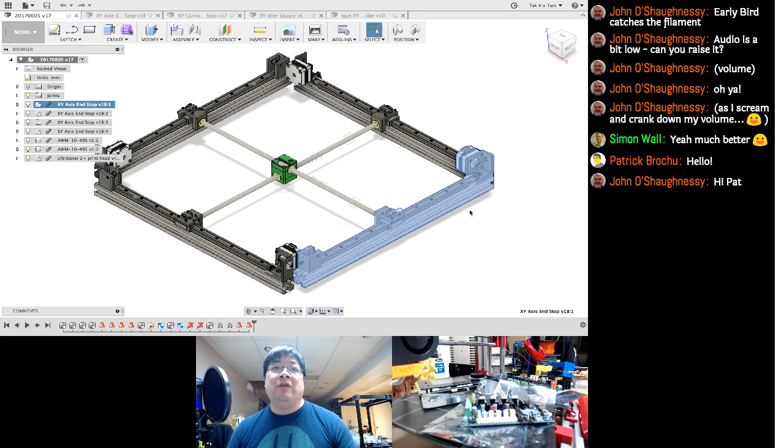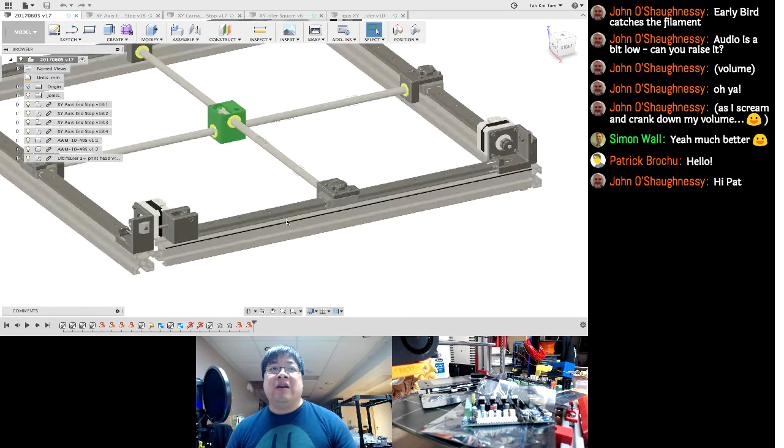Right now the extrusion, the whole one side of the square, is 500 millimeters. So if you factor in the fact that you have two 30-30 at the end, that's 560 edge to edge on all corners. It is big. It is more than half a meter square. But we needed that for a few reasons. The rail, let me see if I can highlight that. Yeah, there we go. That linear rail is 400 millimeter travel.

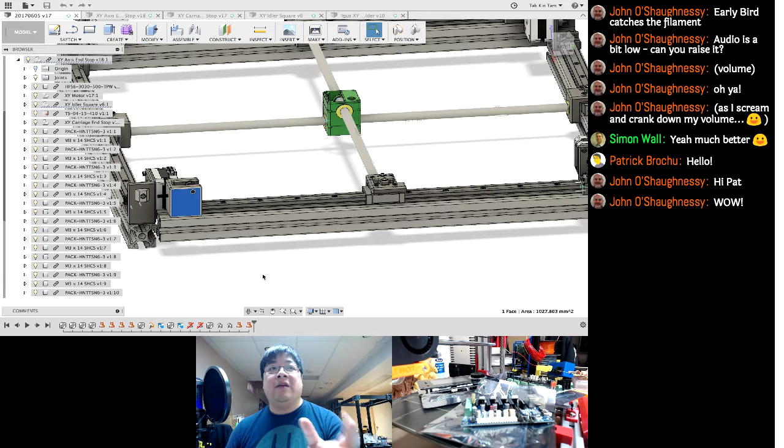So with that said, I needed about 45-50 millimeter for the motor mount. The smallest NEMA 17 is 42 wide, so having a 50 millimeter mount is kind of the minimum you're going to get out of that side. The idler side is 35 to 40, I haven't figured out the design yet, but right now it's 35. That leaves about 15 millimeters of gap here, used for the belt tensioning. We'll get into that in a second.

Because the rod is also placed in the middle of the carriage, effectively it gives us a travel edge to edge of 368 at the minimum, and if we move this idler towards the edge, we'll probably get about 370. But conservatively, advertised travel is 350. So that gives you 350 on the X, and I haven't decided yet, maybe 350 or 400 on the Z, depending on how you guys feel. So that minimum is going to give you a 350 cube.

It doesn't sound like a lot, but the MK2 bed is what, 250 by 210 and 220 high. So effectively, in two directions we are 100 more, 150 more actually in some, and then 100 more in the other direction. That is huge in terms of increased volume of what you could print.

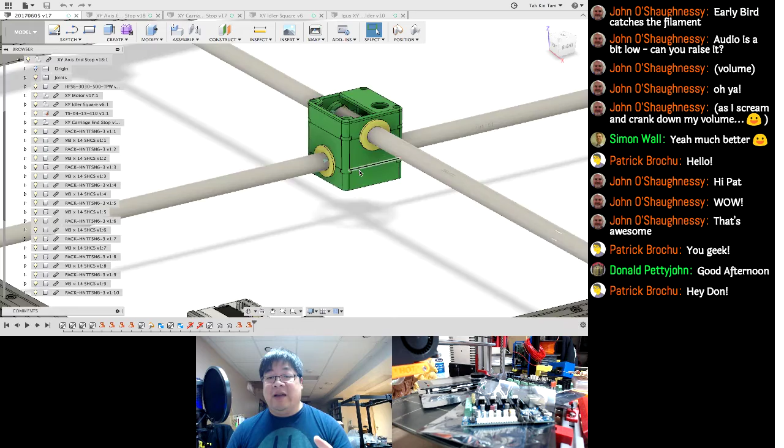So, to give you an idea of the size, keep in mind, this is the STL I pulled off of Ultimaker GitHub, it is the exact spider used on the Ultimaker 2 Plus. So keep that in mind when I show you pictures of the Ultimaker 2 Plus later. This is the size of the spider compared to the print surface. You could tell how big this print surface is.

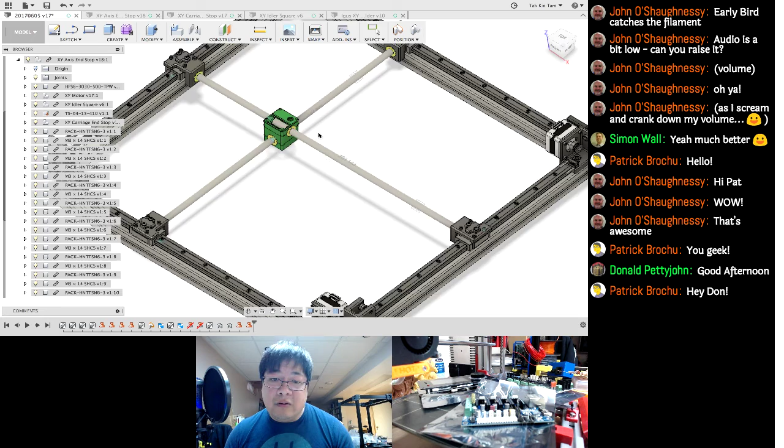Like if we look at this, let me see that. Let me move that. That's one thing I didn't like about Fusion. The numbers are really hard to see.

Okay, so roughly about there. So from here to where the spider is, is roughly the print surface. Let's go a little further this way. That's roughly the print surface of the Ultimaker 2 Plus. So this quadrant is bonus. You normally only get this much, and this is going to be the extra build profile that we're going to have.

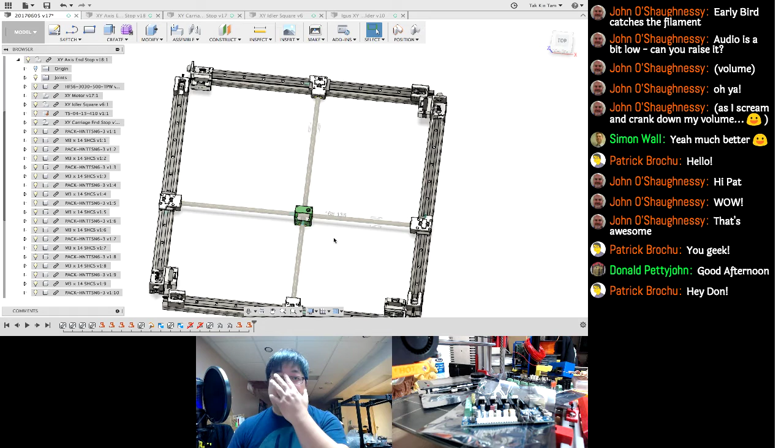It's still going to be smaller than the Gmax 1.5 XT on the actual footprint, because there's two problems. One is we're restricting ourselves to lose about 50 millimeters of travel all around, because we were working on the restriction of having everything inside the enclosure, so that the enclosure walls don't need any interface. You don't need any holes or anything like that. It'd be fully enclosed, so all the hardware is inside.

So out of the 500, we lose about 100 for the sides. So we really only have an internal work volume of 400 to work with. Plus, then we have to worry about things like the motor mount. So that's why it's down to 368 from 500.

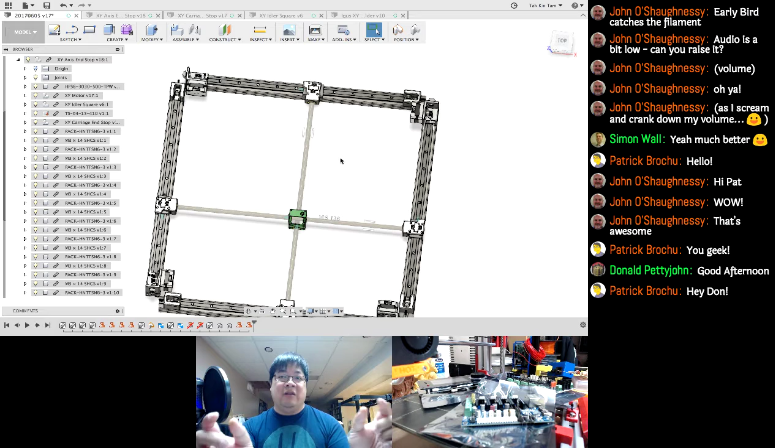But the reason why I might pump that up to 600 extrusion and 500 rail is because you still lose 50 on each side, but percentage-wise you're losing less, because you're scaling it up, and that 50 over 600 millimeters is tiny. So if we went up by 100, that would give us 468 all around, basically the volume would be almost 8 times what the MK2 is going to do if you did it in all directions.

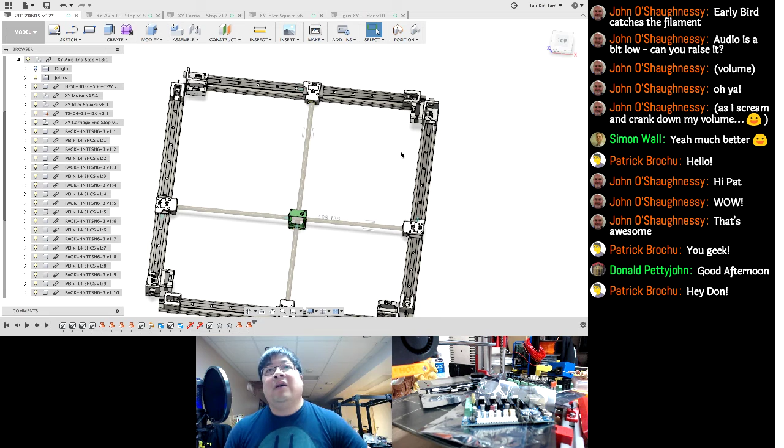So let's just go and get to the top. This still uses the cross beam or cross rod gantry system. This axis moves along these two carriages, and this axis moves along these two rails, and by combining the two, moving the motors at the same time, you effectively have a plotter action where you could put any coordinate in the space here.

So the one advantage of this versus, let's say, D-Bot or any of the other ones where they have a lot of motorized stuff you're moving around, is that the motors are stationary, and you're pulling it along the linear rail.

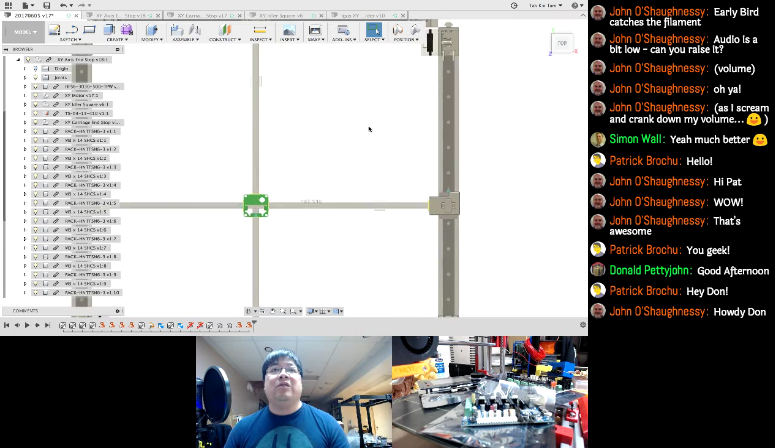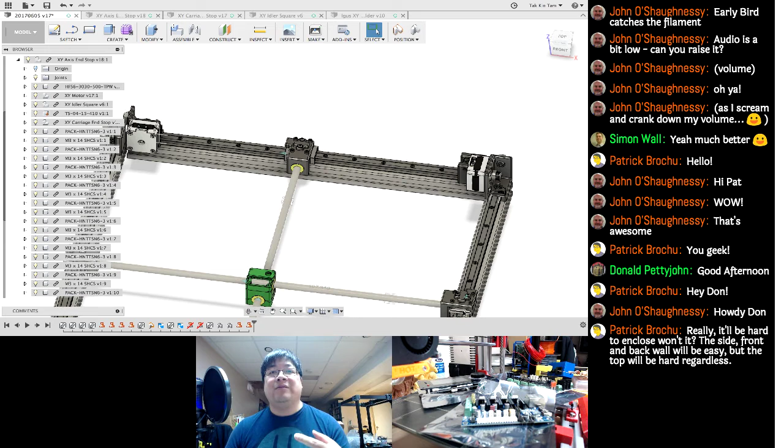The switch to linear rails actually was a conscious decision to eliminate a lot of the rods, because if you look at an Ultimaker, this axis would have been a rod that this carriage rides on, and it also acts as the axle from the motor to turn the pulley to move the corresponding carriage.

So now the other problem is that when you go over such a long span, like we're doing 500 millimeter spans, you have certain sagging. So with linear rails, it's fully supported on the extrusion, so there's no sagging. I mean, it's part of this extrusion. The carriage rides on this rail, so there's no chance of deflection on the linear rail itself.

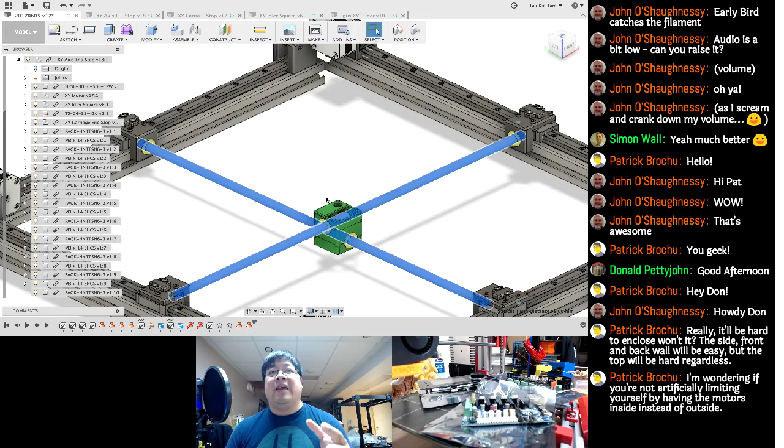The chance of deflection is going to be on the cross rods here, but because there's 4 points of contact and then the fifth here to kind of tie the two together, you're only going to have sagging at the edges. Most of the time this spider is going to spend is the movement inside this center area; the only time you're going to get sagging is when you have an extreme condition where you have the spider in one corner, so these two rods have a chance of deflection here and here.

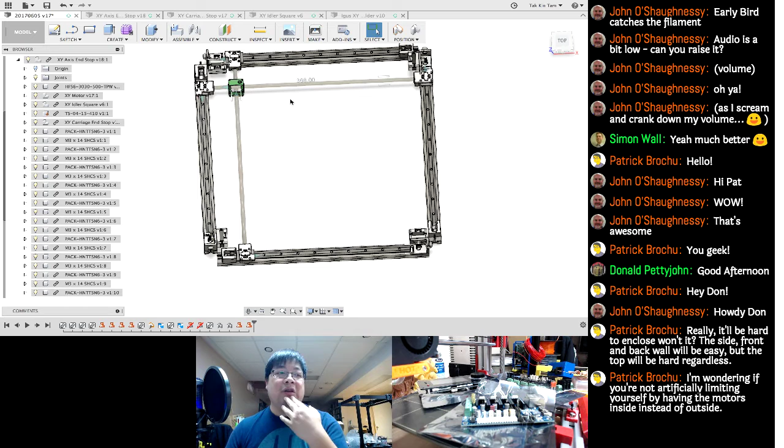But the time that you spend in that corner is very low if you start to just print your stuff kind of in the 80% area, right? So even then, that span is only about 400. So on a 10mm rod, 400-ish is still pretty good for deflection. I got a rod here that I'll show you guys later, but the chance of that deflecting and bending over that is pretty low. So I'm not going to really worry too much about it. And it only starts to sag on its own weight.

So I'm looking into using aluminum rods or carbon fiber rods for this. I know that I was talking about carbon fiber rods before. I need to get them made. I know a guy who can make them exactly 10 mil, so we don't have to sand them or anything like that.

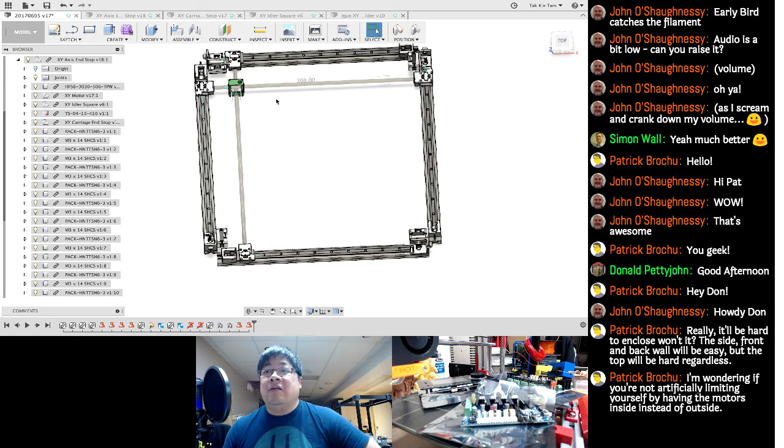Well, so I am sort of artificially limiting myself by the virtue that I'm trying to keep the outside walls clear of any sort of protrusions from the motor and stuff like that. At the same time, it's not a huge hindrance. I guess the alternative is that we could put the motor on the outside. What would you gain back? You won't gain back any clearance. What happens is that you would keep the motors on the outside of the enclosure so that in case there's any sort of heat issues, it'll be on the outside.

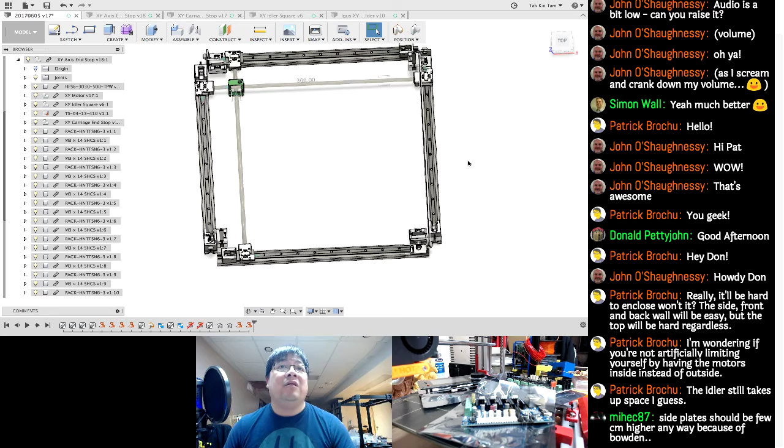If I zoom in here, right now it's not really showing it because I haven't added it yet, but there's usually either 30-30 or 60-60 extrusion here, and this is kind of the demarc line where the outside extrusion would be where you slide the wall for the enclosure. You could flip this, like mirror this whole motor mount over so that the motor's on this side of the demarc point. That'll keep it on the outside, and still the pulley would be in the same spot, so you don't have to worry too much about that. You just basically play around with that motor mount, but the rails and everything stays the same.

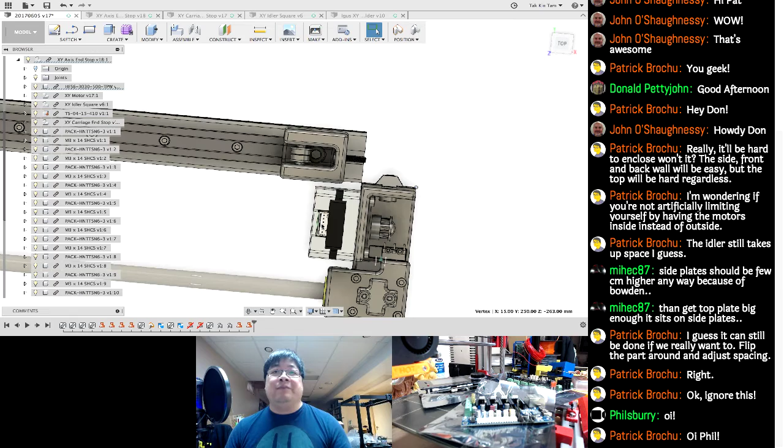Because we're not even in alpha yet. We're entering alpha, so we might as well just kind of play around with it. For me, I don't really see an issue because I have all this space to play with anyway. Because this idler on the other axis is constraining how far the other rod could go here, right? So I have this much space to play with. And sticking a motor here makes sense because then it's more compact. So we could play with that. That's something that we could deal with later.

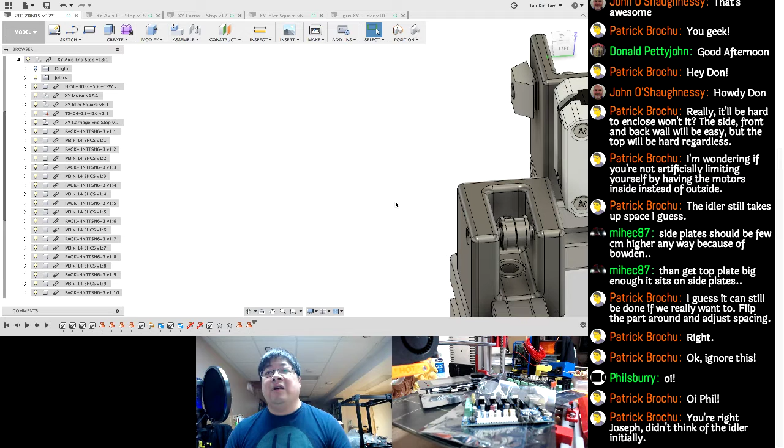So since we're in this corner, I will show you the tensioning system. So these two are the two idler flange bearings. The flange bearings are used to return the belt to the other side. And how we would tension that belt is, get a good angle here. There's an M4 bolt here that comes through this block and into the nut that's in the vertical member here.

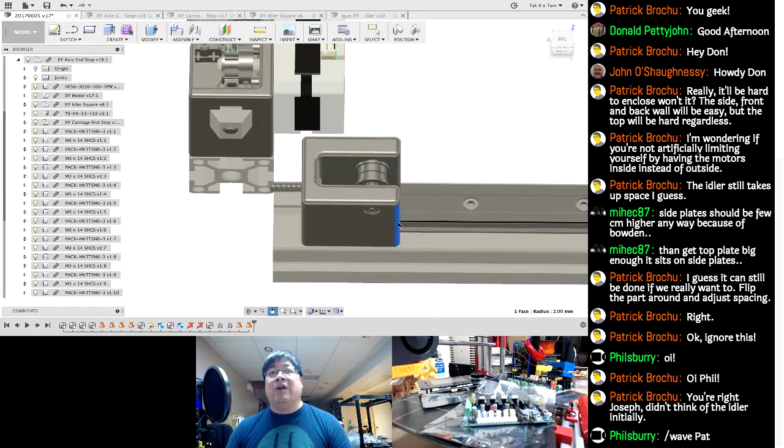By tightening this bolt, you're pulling this whole thing closer and away from the belt, so that you tension the belt by moving this block along the extrusion. So ideally you kind of have a built-in tensioner, and you don't have to worry about tensioning the belt at the end of the belt mount area.

This is going to tension right here in the end, and I think I showed this in one of the previews. This bolt is actually accessible underneath this idler, underneath the belt. And also the mounting for this is also accessible from the belt side. So you would have to use a ball end here, and you use a straight one here.

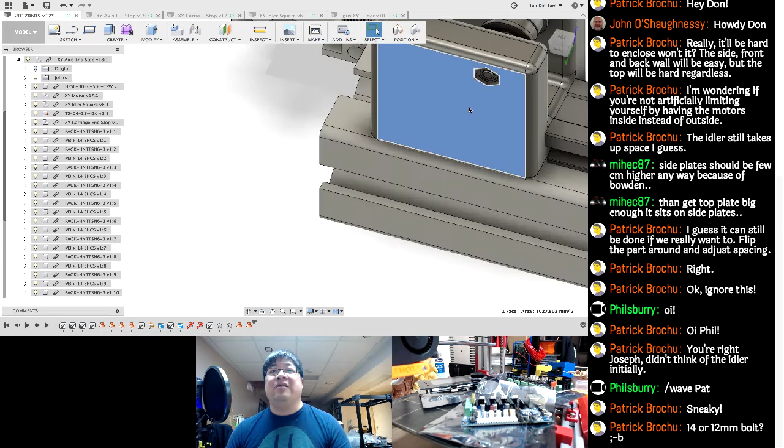But what you would do to adjust the tension is you will loosen this one just slightly, enough to allow this block to move. Then you would use this M4 bolt to add or remove tension on the belt. So that's how that tensioning system is going to work.

You're never going to let me live down that 12 and 14, are you?

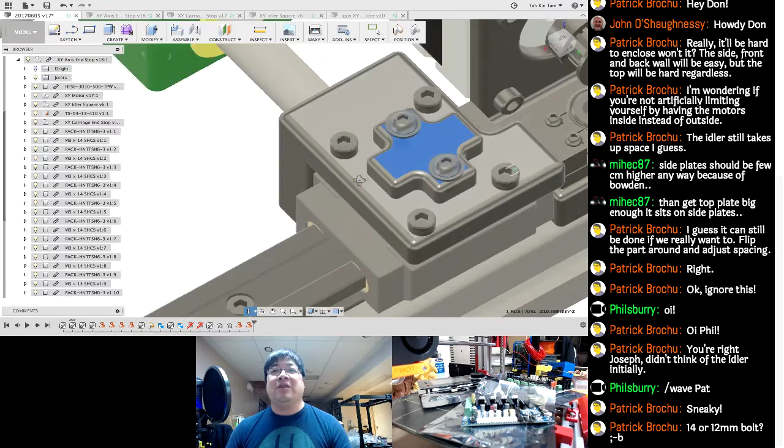So this is that two-piece belt mounting system. So basically what this is, let's start at the motor end first. Sorry. The end stop is going to be on top of this ramp, because then I could print this without using supports. The little protrusion here will hit this micro switch, and that's gonna be the end stop.

So we're gonna have to play around with how much to protrude this to hit this particular switch, and which switch we're gonna use, and then the distance and stuff like that. But basically the idea is that this will hit the switch and stop it, and that's the end stop. We might put some kind of adjustability here by putting a screw or something, but I don't think we really need it.

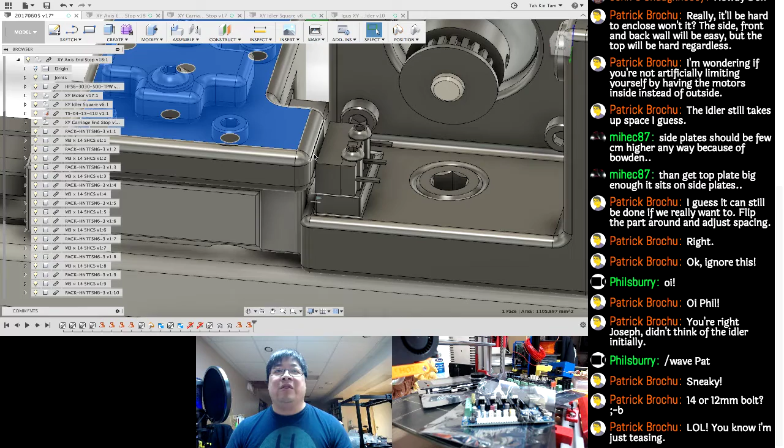With the rails, worst case scenario, you're gonna basically ram the carriage into the motor block. That motor block is going to be pretty sturdy because it's held on by one nut on the vertical and one nut on the horizontal. So the chance of you knocking that out of the way is pretty low.

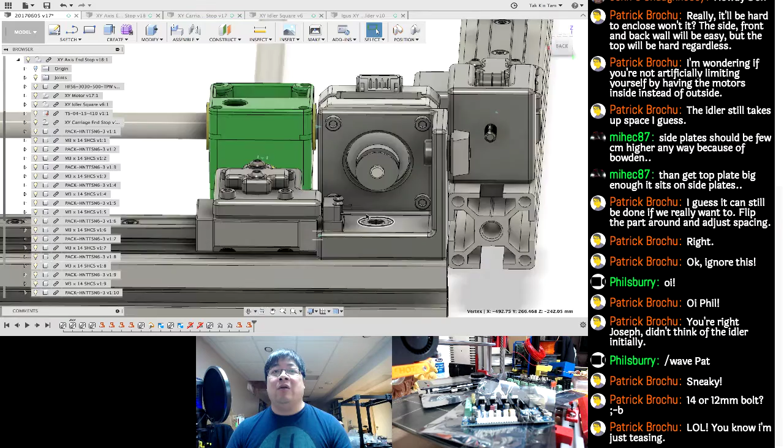The other thing is this particular bolt just clears this ramp. With the micro switch not installed, you could install the motor first, then install the micro switch. So it's just enough room in there to make that work.

This printed piece here is the rod holder that's going to hold the cross rod. It's a two-piece design. So basically, what that means is this piece is going to be a printed piece that, like I showed, this end is going to hit the end stop. This side holds the rod. It's going to get bolted to the carriage by these 4 bolts.

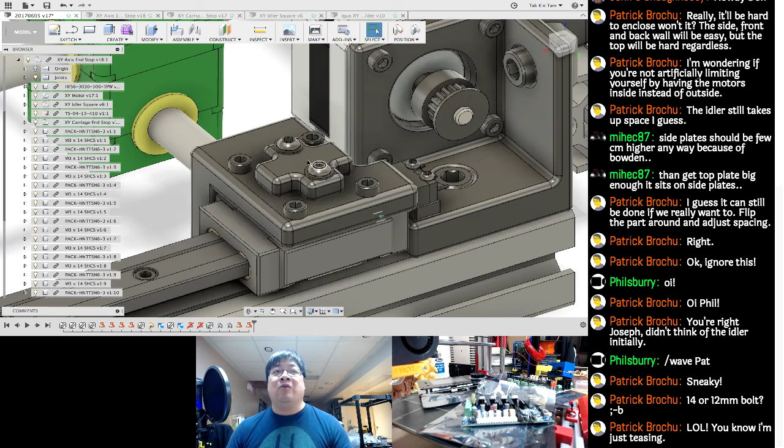And once you do that, you have this belt holder that is separate from that rod holder. So you could install the carriage first, then install the belt holder after you pinch the belt in there. I have to change the design of this belt holder a bit. I think I need a hole in the middle here so that you can pull the excess belt out of the middle, and I might want to make this a tiny bit bigger because it is tiny.

I'll show you guys the printed part later. It is very tiny, and I think I was trying to keep this kind of neat. So I'm gonna make this slightly bigger so that when I make the hole in the middle, I don't worry about strength because I'll have to cut a hole in the middle.

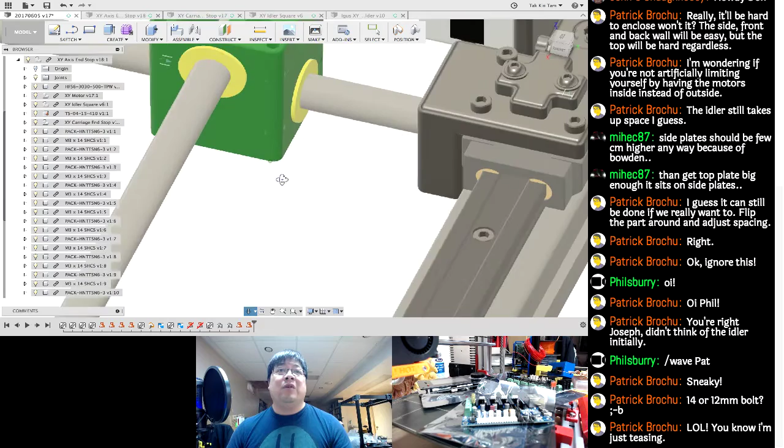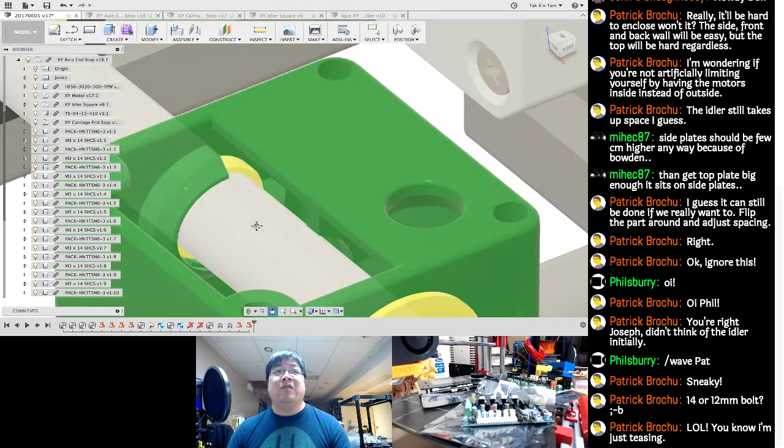What else was I going to talk about? Oh, so last time I mentioned it as well, I'm using the Ultimaker spider. The Ultimaker spider normally uses LM8UU size bushings for this cross rod, and that is just exactly perfect size. I don't like to zoom in there. That's exactly perfect size for the flange bushing that we're going to be using.

So that allows me to use a 10 mil rod on an Ultimaker 2 spider. So I don't have to actually even draw the spider. Then you could use all sorts of cool stuff like the Olsson block and all that other stuff; you buy the Ultimaker 2 block, and then you're ready to go.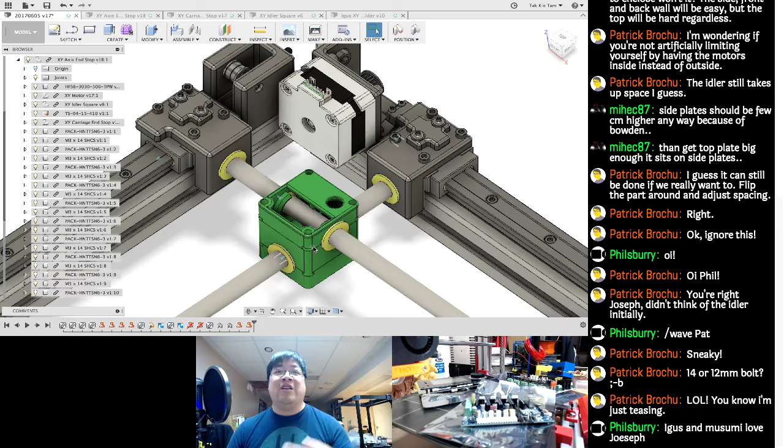That flange bushing is exactly the same as this flange bushing, so it's not a different part. So it uses that way. We only need 4 for the 4 rod holders, and then 4 for the spider. That's 8. It's a very low parts count for that. I'm gonna test that. I'm receiving the spider and the bushings probably in the next few days. I think they say they'll send it out in the next few days.

What else can I talk about here?

Yeah, so basically, other than the stepper motor, the idler pulley and the bearings and this end stop switch, everything comes from IGUS except the Misumi extrusions. So yeah, those are the two that I'm gonna work with.

The extrusions, I had talked to T-Sun, so basically they will manufacture the exact specifications that we're gonna give them from the same one as Misumi. So the European and Asian guys don't really have to worry about that. You're gonna be able to get it from T-Sun directly. The rest of us can get it from Misumi.

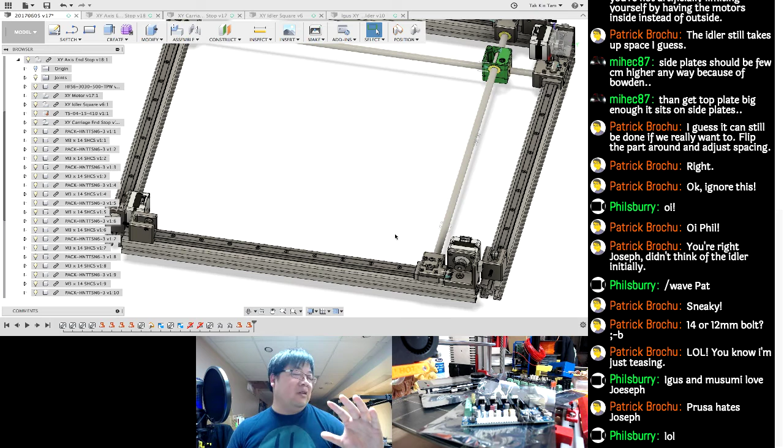I think they will ship everywhere, but what I'll do is if you can't source it yourself at a reasonable price, and if the shipping is not too outrageous, I will ship them. But shipping 500 millimeter length rails is probably very expensive. So I don't know if you kind of want to get into that.

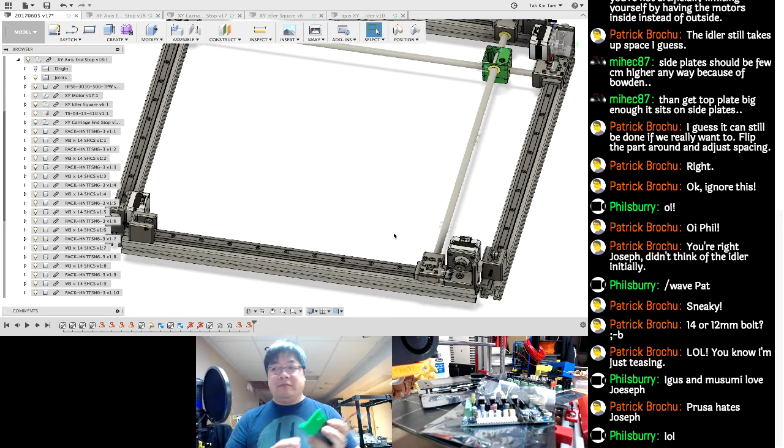I guess show and tell. So that is the motor piece that we're talking about. The end stop switch here basically will clear this bolt, and the switch is a very tiny micro switch, and it goes sort of like right there. My fat thumb is going to get in the way, but that's what it's going to look like basically.

Normally you will see other designs where the end stop is a separate piece that you print, but in this case we sort of integrated that there so that it prints pretty nicely. You don't have to worry about having a separate piece that you need to mount. Everything is in close proximity where it needs to be.

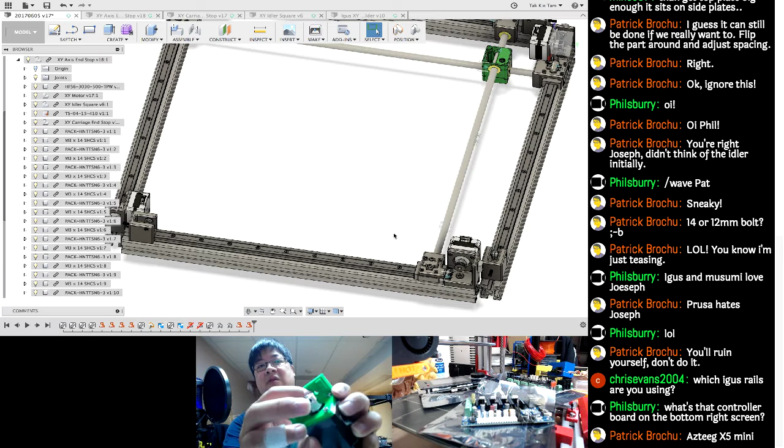The only thing is that to get to this bottom bolt, you're gonna have to remove the idler and use a ball end. But because this is stationary, you don't move this, so you could actually install the mount first and then install the motor later. So that won't be in your way when you actually use it.

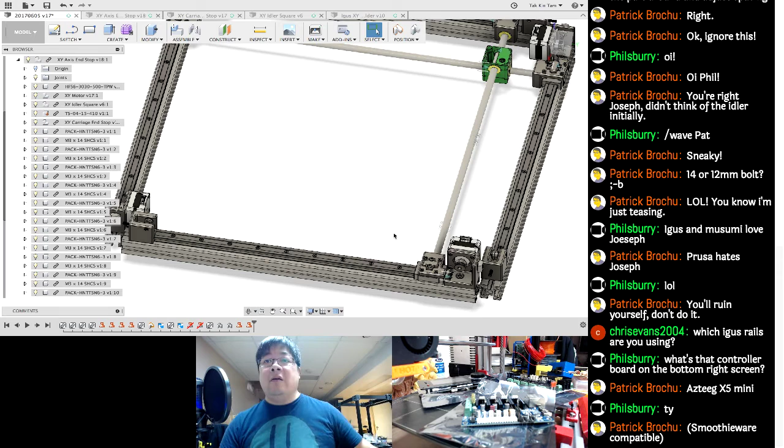Chris, the IGUS part number is TS-04-15. So I'll put that in the description. It'll be in the BOM.

I showed this on the 2 streams already, but this is the 12. What the 12 means is the 12 millimeter rail width. This was a sample they sent me, and I'm going with 15 because the 15 sits better on the 3030 extrusion. The cost is about the same. So the only difference is that this rail is 15 and the carriage is 15 to match the rail. The holes are M3 holes.

So we're gonna have to get some M3 T-nuts. I gotta check with T-Sun whether they could get 3030 T-nuts that are M3. The idler uses M4, and all the mounts use M6. So unfortunately, there's 3 different size T-nuts.

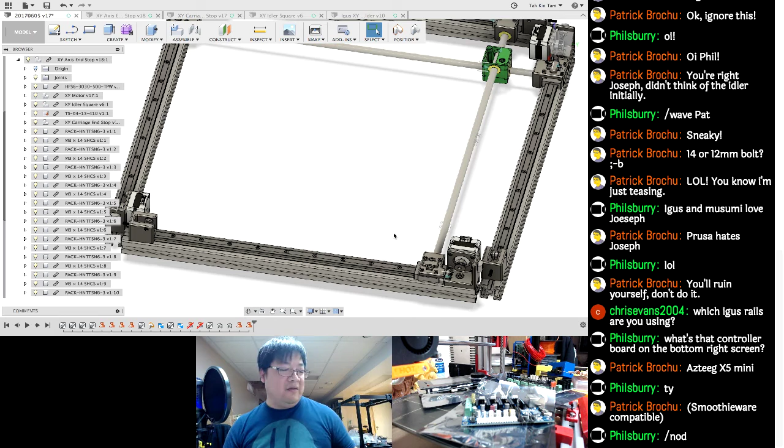I will try to see if I can make this idler work with an M6, but it'd be overkill because the length coming out of there is going to be pretty long, and an M6 that long is going to be even harder to source and more expensive than just going with a single T-nut. So if Megan at T-Sun can't get them, I will sell the M3 and M4 T-nuts separately in a kit on the Tindie store.

I think I showed you guys last time. You can hear a little bit of the bushing material rubbing against the rail, but it's gonna be pretty much dead silent. It's not gonna have that really annoying ball rolling sound when it moves, right?

So I showed this one, and we added alignment blocks on the hole itself. So when you actually put them in, they align and they give you a surface so it won't crack the hole there. So all of them are designed that way.

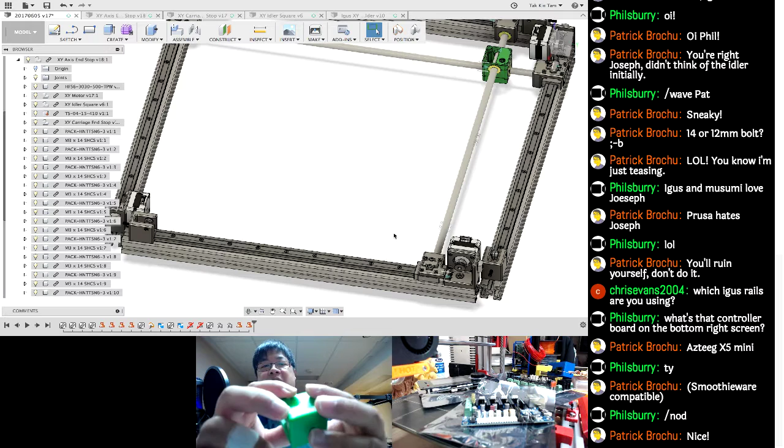The idler I just showed you guys. Basically, the 2 flange bearings are the belt idler. I had to fix the clearance a little on there, but that should be flat, sunken into the piece itself, so it should be flush. Then there's a nut trap on this side. It prints in this orientation, so all of these will work just fine. Again, the alignment block there.

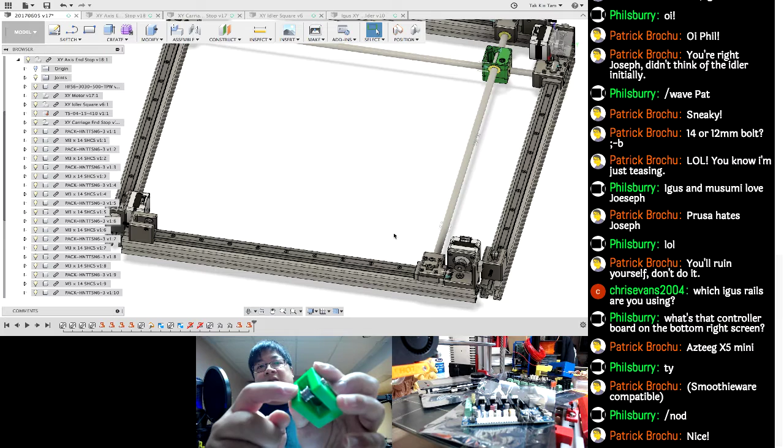This is totally overkill. I think the walls are like 8mm on either side. You probably can't see it, but I'll show them all later. There's little protrusions that hold the bearings up away from the wall and center them on the bolt. So that simple part took all night yesterday.

Thinking about how to make it printable and how to add the idler in and all that other jazz, the spacing of the height of the idler, everything was measured out. So it took all night to make that, even though it looks simple.

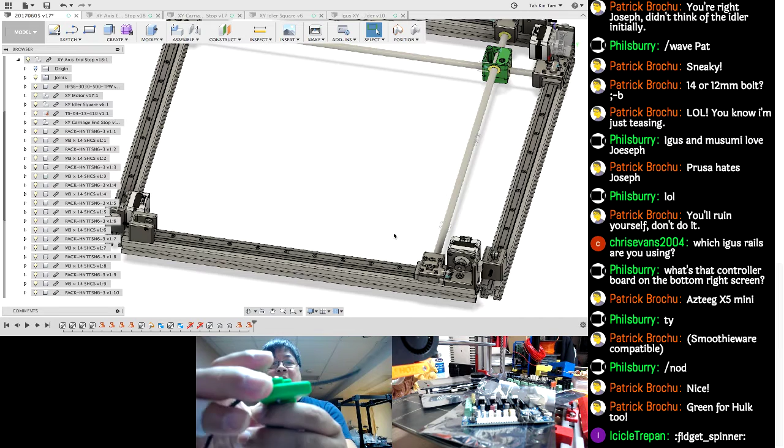This, so you can see that one there. I'll take the rod off because I don't want to be banging my monitor on it. But basically, that is how the belt's gonna get held on there with 2 bolts, and that way you could separate the belt from the carriage and not have any issue. But I'm gonna change this part so that there's a hole in the middle there, so that you can pull up the excess while you're tightening down the 2 ends.

Because I didn't really think of that. When you install it, you're gonna have 2 loose ends. You kind of want to pull that up so that it's out of the way. So I'll add that, but the clearance on that is pretty good. Like it's gonna be clamping down. The teeth is on the part itself. Maybe I can take that off. Probably can't. I'll show you guys on the model later.

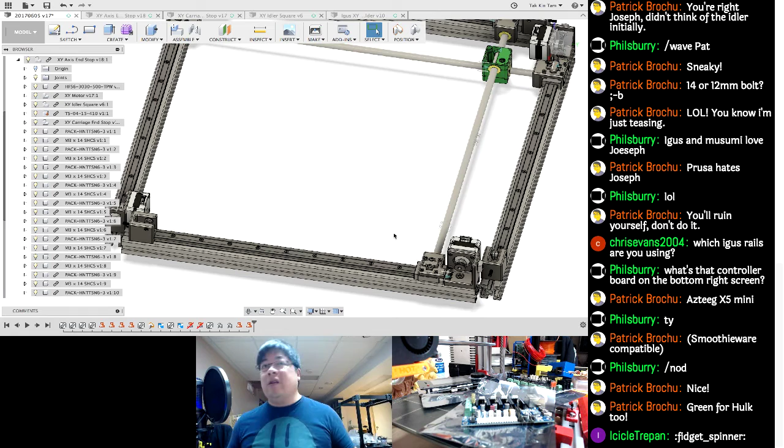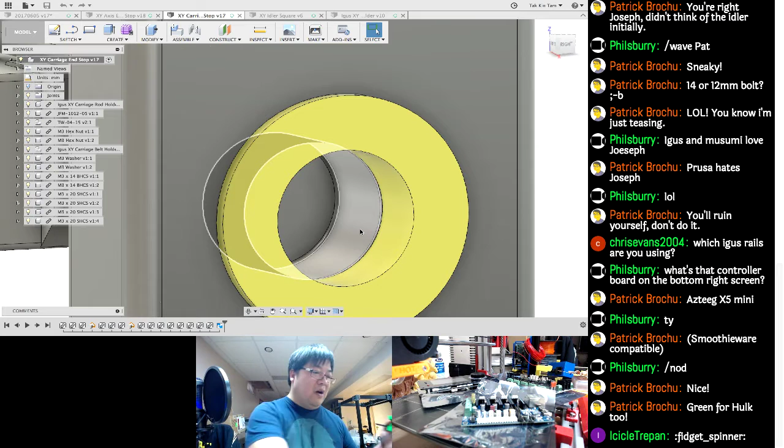So let's just finish up with, not SketchUp, Fusion 360, so that we could kind of go from there. So this one. So again, this piece comes off without taking off this one. Oh yeah, gotta show you the rod then. The change here is the depth of that hole. We made that 5mm so that is now a more snug fit in there. It was 3 and it was barely hanging on, so I made it 5.

It's not really going to affect the travel too much because we actually never get to the end of this zone here because of that 50mm gap on the motor. We actually only get pretty close, but not close enough to hit that. So that was enough to add the material there to make this really strong and sturdy. So this one is a 400 millimeter long 10 mil rod. It's not deflecting, but it is quite heavy.

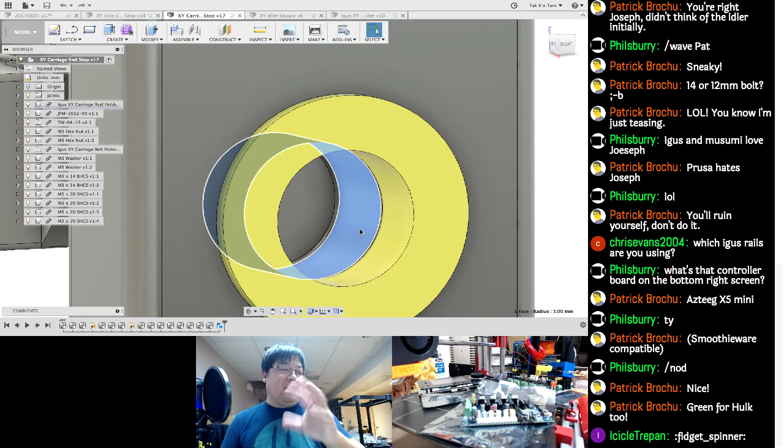So I'm talking to Igus about using a hollow aluminum tube, and they're gonna check with their engineer whether, on that 500 span, it's gonna have enough strength, even if it's hollow, to stand up to the movement. So they basically asked me for the expected movement speed, the weight and everything else. So I had to get those to them so that they could run the simulations on it.

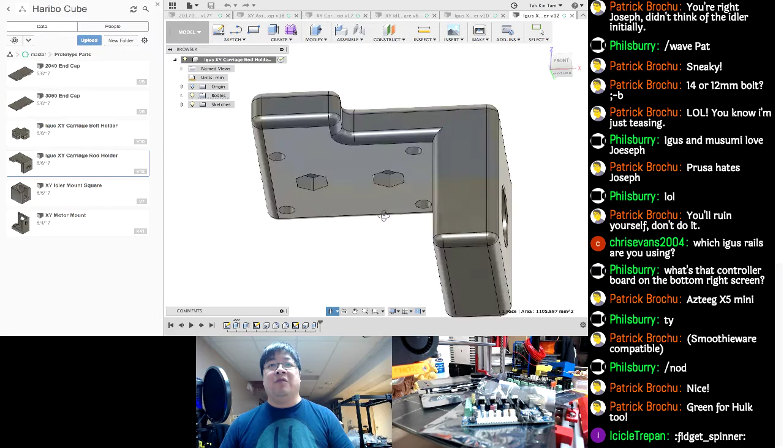Oh, last thing on the belt holder. There's nut traps on the bottom. I'll show that in a model. So nut traps on the bottom here. That's how that belt holder is being held in. Basically you put the nuts in there, and then the carriage will hold them in place while you install the belt holder from the top. So this is the flat side you put on the printer, so all of these features will print just fine. Like I said, this is now 5 mil, so that's the only other change on that part.

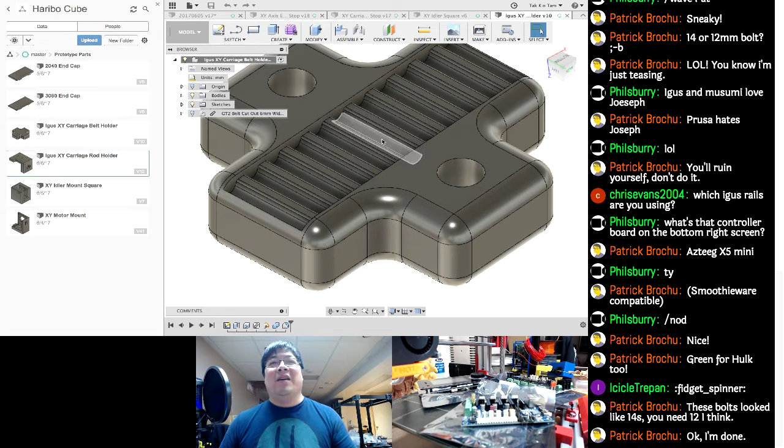This is that belt holder. I'm gonna have to cut a hole here so I can fish the excess belt up there. I may make this a little bit longer because from looking at, yeah, there you go, that's the one. Look at this. I have another 5 mil on this side and probably another 3 mil on this side. So I probably could make this slightly longer to compensate for the hole in the middle. Because I want to at least have 4 or 5 teeth of engagement before it comes up to the hole, so that it holds it tightly.

So if I cut the hole in here, I really only have 4 and 4 on this side. I kind of want to make that 5, maybe 6 and 6 on either side, so that gives better belt engagement.

Yeah, I was thinking of that, but yeah, he's gonna bring that up on the next stream, right? So, I guess because it just looks neat when it's slightly smaller than what you need. So I'll see what I could do.

I mean, that was a fairly quick part. That was like 2 center rectangles, and then I used the belt profile to cut into that body, and that was like 20 minutes. That was just kind of proof of concept to make sure that that belt holder is gonna work, and it does. So I just had to adjust the size and the mounting on it, right? So that will need some work tonight, but could get that out of the way.

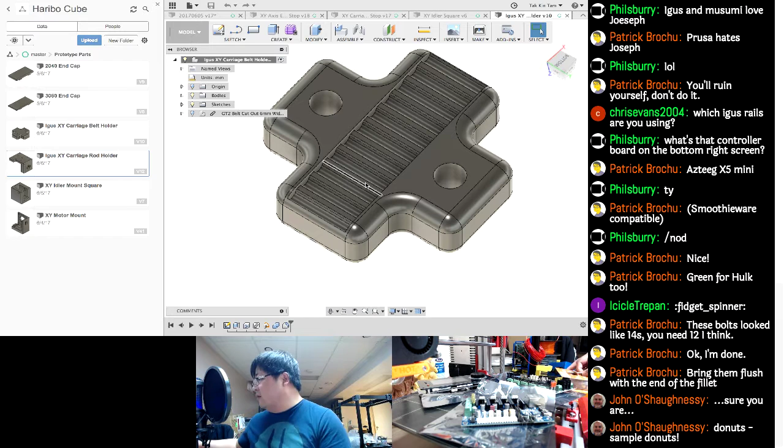So yeah. Okay, so let's go and talk about these controllers and see. Let me get something else.

I gotta get a new chair. This is a very squeaky chair.

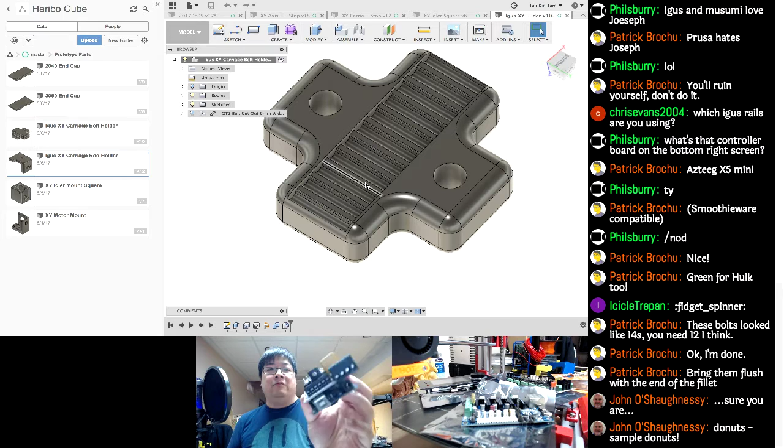So this is a RAMPS board with Arduino that you normally get with any of the generic printers. Yeah, it's gonna use four steppers, because if you use four steppers, then I don't have to link the two by rod and belt and all the other jazz. The two pairs of steppers are gonna get wired together. Oh yeah, I'll flip that in a second. Two for the X and two for the Y, and then they'll be wired in series so that they will run in the same steps.

And then, what was the other thing I was gonna say? They'll run in the same steps, and then they'll run through the same driver, so you don't need a separate driver for it. So it'll work. I had checked with Leslie, he's the electronics guy, and he said it works just fine. So that way you don't have to worry about using a rod and belt to synchronize the two sides, because if you think about it, you have the stepper on one side, and then you have a rod that goes all across and turns another pulley. Those two pulleys, and then turning more pulleys on the end, that's a lot of drivetrain loss.

So, series or parallel, we're gonna have to test that. But from what Leslie said, it really doesn't matter. He likes series, and I was like, okay, fine, we'll go with series. Let me just see if I can flip the display here. That's better, right? Okay.

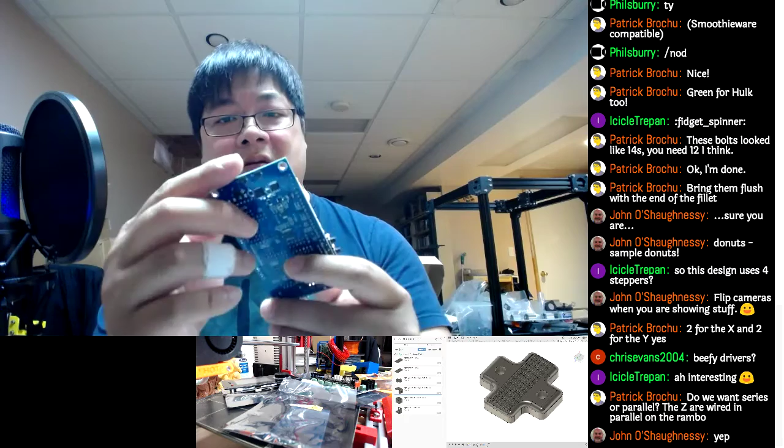Oh, Ethernet. So this is one of the boards I was telling you about that had Ethernet on board. So you don't have to buy a separate interface for it, but the problem is that it only has 4 steppers. So X, Y, Z, E1. But I didn't like the connectors for the power, bed and extruder. Yeah, that's easy enough to remove. I might get Leslie to do it. He's very good at it. He has a desoldering station, so I might do that.

Depends. I mean, these are still technically Phoenix connectors. Phoenix is the company, right? So these are still Phoenix connectors, but yeah, if you wanted a removable plug like this, like the RAMPS, right?

Then you sort of have to desolder that one and put in another one, but no big deal. One thing is that he used to, and I think you could still do it, is you could ask him not to install that when he puts the boards together. Because I'm pretty sure, from what I remember last time, when I ordered the stuff from him, you could actually get it custom, not to have that on there, and then you could just kind of do whatever you want with it.

I'm not sure, Pat, is that the micro SD slot? So I think that's what that is. And so overall, the 32-bit board, I think, is $109. So that's not a bad price for that. And it's nice and compact, got components on both sides, so it looks pretty good. Patrick's been playing around with it, so I'll let him talk about it later about whether or not it's any good.

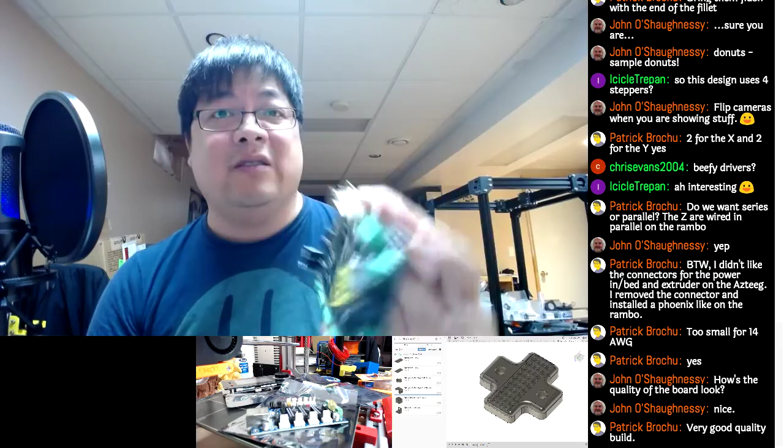GT, X5 GT. So compared to the Rambo, it is quite a bit bigger, but it's not as thick. But the footprint basically eclipses the entire build, right? So the matte black board, it looks very good. The only thing is, you guys probably see already, some of these sockets and these guys up here, if I hold it straight, it's a little crooked. I guess I'm just a little bit picky.

These will work just fine, and your drivers will plug in just fine, but they were a little crooked. So if you actually see this one, look at this one, it's crooked compared to the other ones. So that's my only gripe about it. But the thing is that this has five steppers, 2 hot end outputs. So if you're gonna follow along and do the dual extrusion, this is the one you need. I know that's what I said.

Compared to the Mini, you could tell they're all flat and straight. Everything was cool in the Mini, but I think the GT was slightly older, and I think it was a different supplier. So I think that's why it looked different too, like the components and stuff like that. I think it's an older design though, and the power in is beefy on it, so it should be pretty good. There's a separate input.

So the major difference between this one and the Mini is that this has 5 steppers, like I said. It also allows you to use what he calls Bigfoot steppers. So you use Bigfoot steppers if you were going to a CNC machine. Like if you want to reuse this later for your Mostly Printed CNC, you could do that.

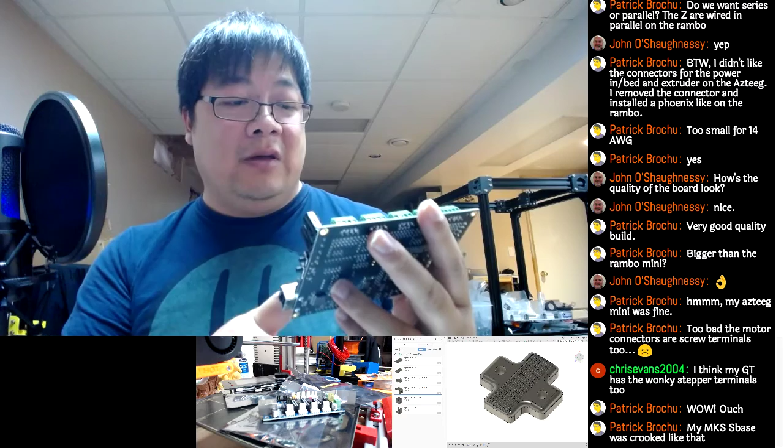Oh, and this one has 2 expansions. So if 5 steppers is not enough, you can actually have an expander board that will give you 2 more, so that's 7. So if you wanted to use this for the Kraken, the 4 extruder, you could do the Kraken on here as well. This is kind of optional, like the advanced dual extrusion path is going to use this one. I think there's a way you could actually get extra steppers on a Mini as well, but not worth it.

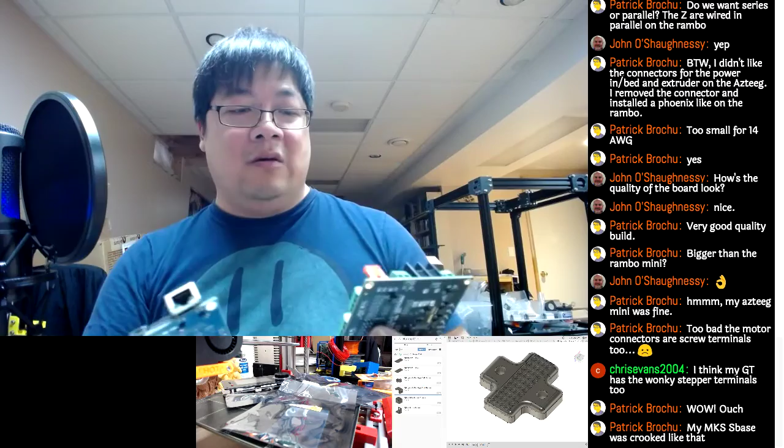I think by the time you look at this one, getting all the extra beefy stuff is going to be worth the money if you're going to go with dual extrusion. Let's go with this one. It is a lot bigger though. Compared to the Mini, it's basically double the size, right? So it still has the reset and the play buttons there. Like I said, no Ethernet, so you're gonna have to use the other expansion for Ethernet or Wi-Fi, done through those two.

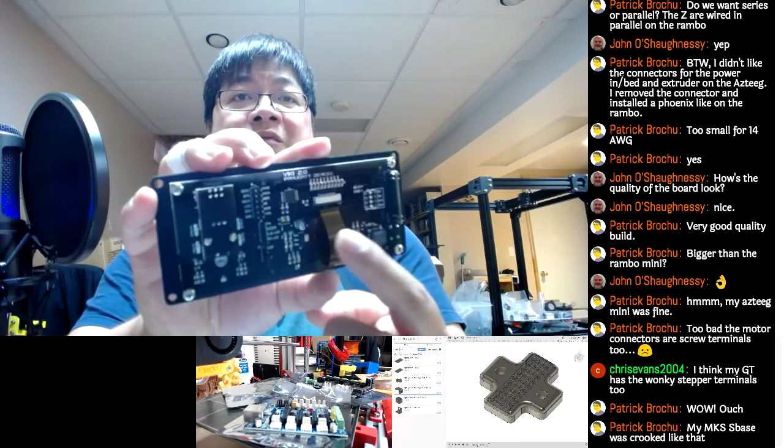And the panel. So this is very nice. I was surprised at how nice this is. The Viki 2.0. The only concern I had was the ribbon cable here. I would probably stick it down with tape like that so that it doesn't catch anything, but it extends the micro SD up to the front. The knob feels very nice. It has a very good tactile feel to it, and that white ring around it is LED backlit, red and blue. When it's heating up, it's going to be red. When it's cooling down, it's going to be blue. So it gives you a visual indicator of what the print is doing.

This is a full graphics display, not the 4x character display. It is kind of basic, but I like it because I could probably just make a mount for it and have it mounted there. I think you could play around with what you show on the screen. I got 2 of these instead of a Viki Mini. The only reason why I didn't like the Mini was it doesn't light up, so that was kind of what sold me on it. It was about the same price range, and it has a really good click feel to it. So I'm happy with it.

It is pricey though. I think it's 79 if you buy it separately. If you buy it with the board, the controller as an add-on, it's only 69. So if you're thinking about getting one of these, it's probably worth getting it with the board. Don't get it after, because you pay $10 more and you have to pay shipping.

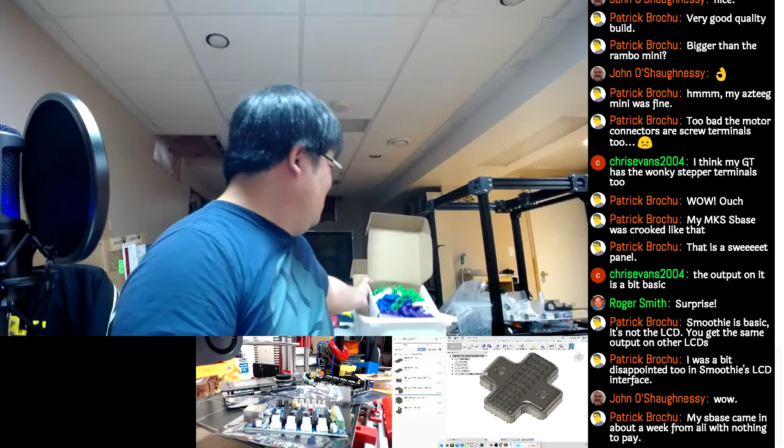Spinner. Whole box full of spinner. It's spinner for days. So these are my design. I've got to still clean them up a bit. There's a bit of stringing on it, but I've been trying to make some money on the spinners. So I gotta pay for some of these parts, right?

But let me just see that. These are the ones I give to. I wish I could focus a bit better on it. There you go. Full ceramic, ceramic balls. I removed the shields on both sides, so there's no shield on them, and they do make a bit of noise, but they are spinning like crazy.

So got these ABEC 9s. I think these were 20. I would say 18 to 20 bucks for 8, so they're not cheap, but they spin forever. And these are the ones I use for friends and family. So when I sell them, I use some cheapo local motion stuff.

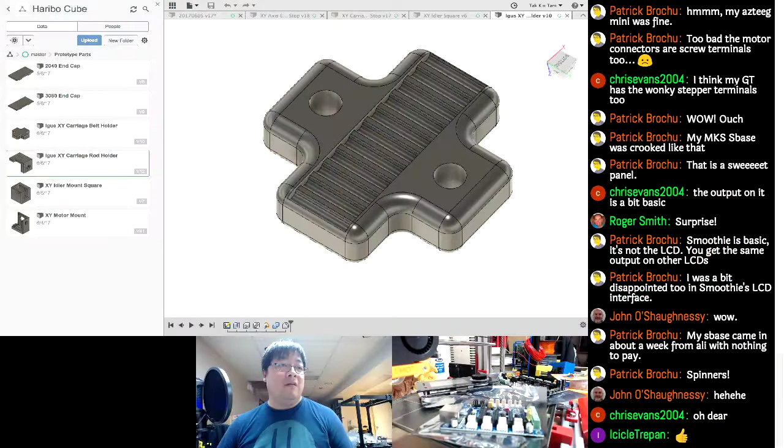So see what else is there to show off today. I think that's it. Let me switch back to the other view. We go shopping. There you go. So while I'm sort of getting set up, I would take any question, discussion, answers, whatever you guys want to do.

I remember there was a question sent to me. Matamos was talking about deflection on the rods. So the problem is that it's a losing battle, right? You make the rod thicker, the diameter bigger, so that it gets strength, but when it gets strength it gets heavier, so you need a larger diameter to make it so that it doesn't sag. So I'm sort of giving up on 500 millimeter steel rods because it is pretty heavy.

For the cross rod, I'm gonna go with aluminum. It just matters which aluminum and whether it's hollow or not. So I would use the 10 mil that I got as the vertical for the Z. Originally I was going to use 12, but I think 12 is overkill. I think 10 I could get away with, so I'm going to use a pair of 10s for the vertical Z.

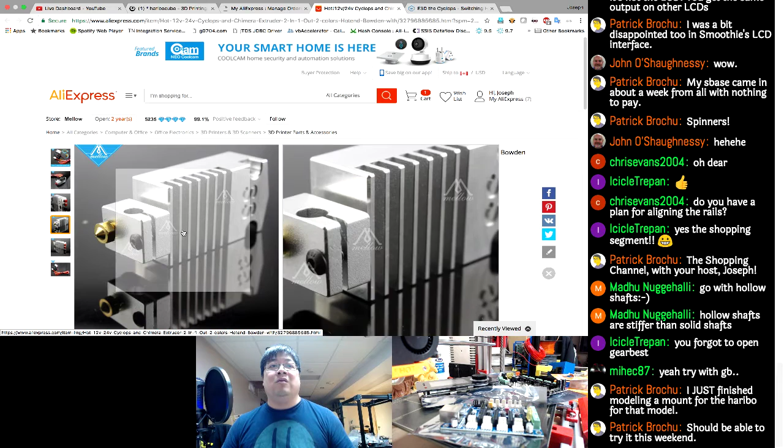Whereas this one, they enter through the top, and the mixing zone is a gradual travel into the mixing zone before it enters the heat block.

So, and the fact that this uses E3D compatible heat blocks and heat breaks and stuff like that, I just feel that this might work a little bit better. So we'll do some testing on that, see whether or not that's a valid assumption. But again, at $32, you really can't go wrong with trying one of these things.

The mounting from the back is pretty good. It comes with a fan and the 40-watt heater for $32 shipped. So we'll go try it with that for the dual extruding. So what else did I buy these days? I think I showed this one off last time.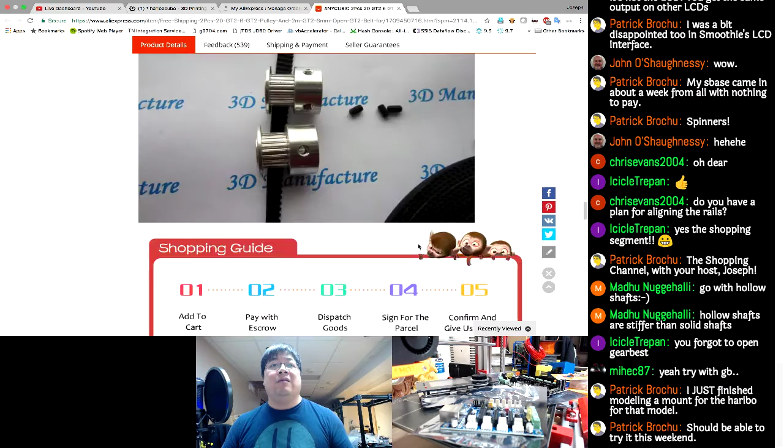So 2 pulleys, and I think it's 2 meters of belt, if I remember correctly. Sometimes they don't put it in the description, but 6mm, 4x3, 1 key, 2 meters. So 2 meters of belt, 2 pulleys, shipped to your house for $2.63 US. I mean, it's practically free.

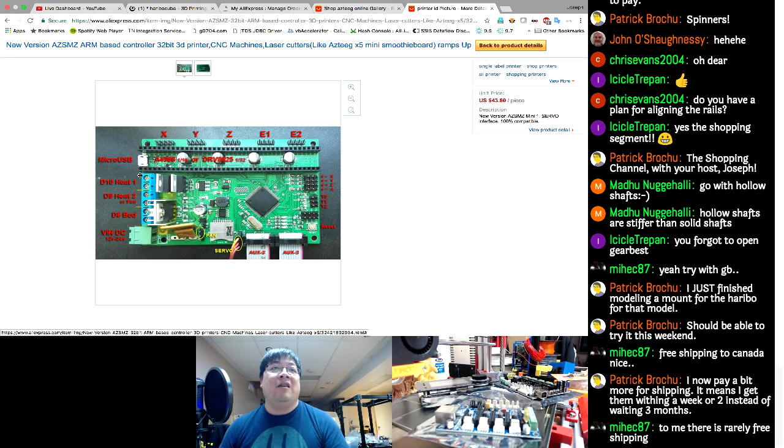It uses the standard kind of cheapo LCD interface with the 2 cables that we normally use. The headers and the screw blocks are questionable, so I'm not sure if I really trust it too much. And it's $43, so it's a good toss up between the Mini and the GT.

And again, no Ethernet, so I think you could somehow, there was a hack I saw to get the Ethernet off of the board, but it's very MacGyverish to get wires jumping off of there into an Ethernet module. And I know I make a big deal out of Ethernet, but the interface is not really there yet.

The Smoothieware Ethernet page kind of sucks, but there's aftermarket stuff you can install on the board that will give you better pages and control on the printer. So that's something you can look into. I just like it because it gives me options, and I don't want to have to run another thing. That's why I haven't been on an OctoPi and stuff like that. So I didn't want to have to deal with that.

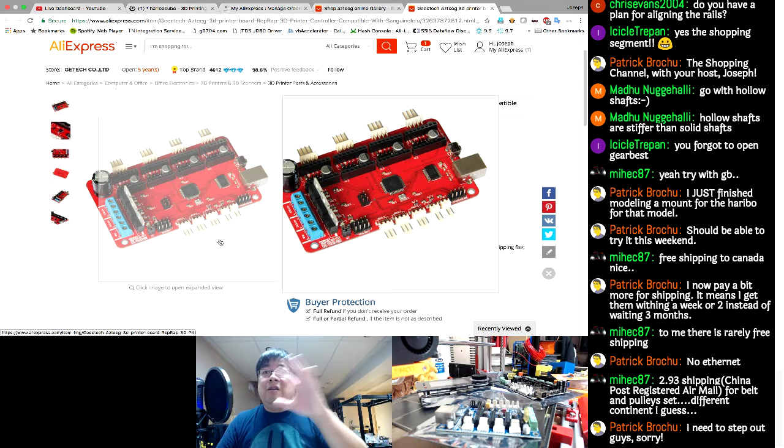You could get a Geeetech version of this, and I think... see you, Patrick.

So I think John could probably tell you a bit more about this company. It is a cheap ass company. This is an X3, not even X5. So basically, if you want a RAMPS compatible board, this is it. I think somebody was asking to compare the size with the Rambo. I missed that part.

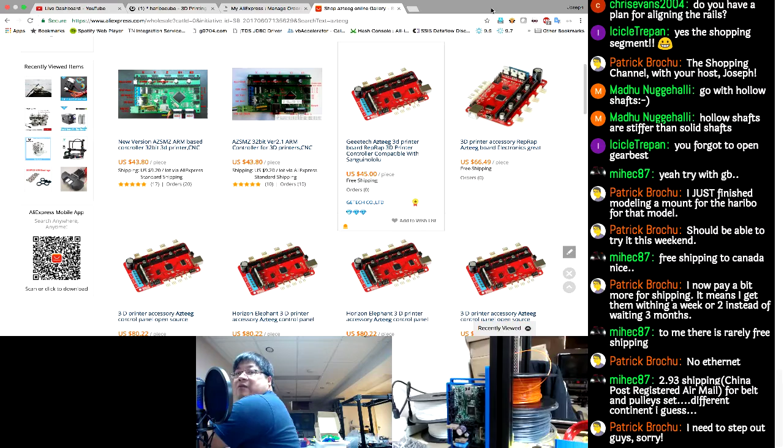Let's see if I could get this over here. So that's the Rambo. Roughly about the same size. If I had to guess, it's about a third smaller than the Rambo in terms of overall footprint.

Yeah, the X3 is the 8-bit, so you don't want X3, you're gonna want X5. So search for X5 and see if you can find anything else. I think this is the only guy that sells it. This is the old version of the board; he sells a newer version now. So yeah, one thing I forgot to mention on the GT.

If I remember correctly, you could actually run dual voltage on the GT. Don't quote me on it, but I think that's why there's two inputs, one for the heat bed input and one for, I think, the 12 volts. So you can run the heat bed at 24 and everything else at 12, and I think there's a jumper for that. So you could set the VREF depending on which input.

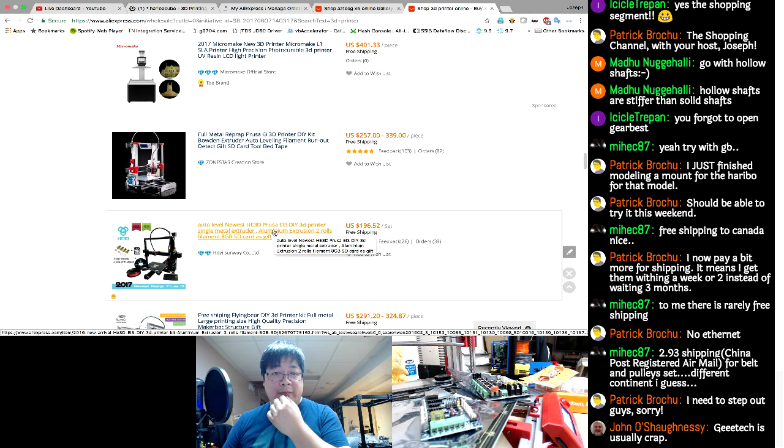There was one printer I wanted to show you guys. Wasn't a Tio, it was, yeah, I think it was this one. Micromake SLA printer, $400. I thought this was a pretty good deal. I saw one review for it, it was pretty good. I think it's worth looking at later, the Micromake printer.

It's full aluminum body, so it's actually pretty decent size too for what it is. Full CNC metal casing, and an SLA for $400. I mean, you really can't go wrong with this if it works fine. It's just a matter of what the resin cost is gonna be. I know everybody's been bugging me about my Form 1, but I think this is a good deal for what you get.

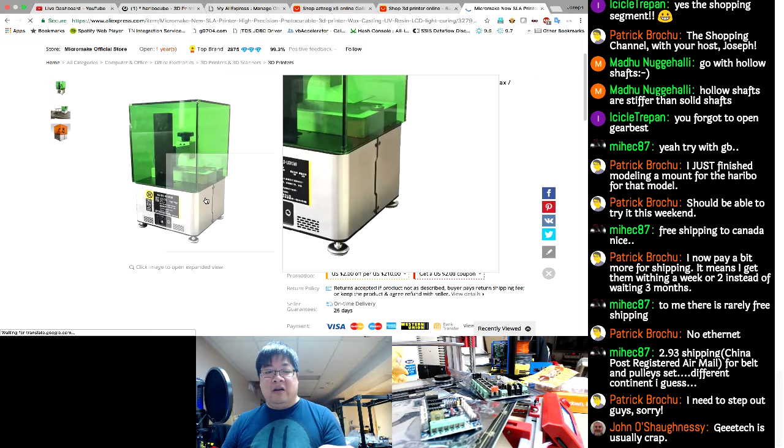They have a few models. I think this is the one with the shield, so it's for $600. Whether or not you need it with the enclosure, have a look at that when you guys get a chance.

Yeah, I'm not going to go to GearBest, so don't ask. Yeah, I think that's it. I haven't really gotten much of anything else these days. Let's see if I have anything else of interest. Give me a second.

Oh yeah, so these are the ones. So ABEC 9, those are the ones I was showing you with the ceramic balls. These are white ceramic balls, but it's a mixture. You either get black or white ceramic balls. This is a lot of 8, so 8 pieces for $16. So about $2 a bearing.

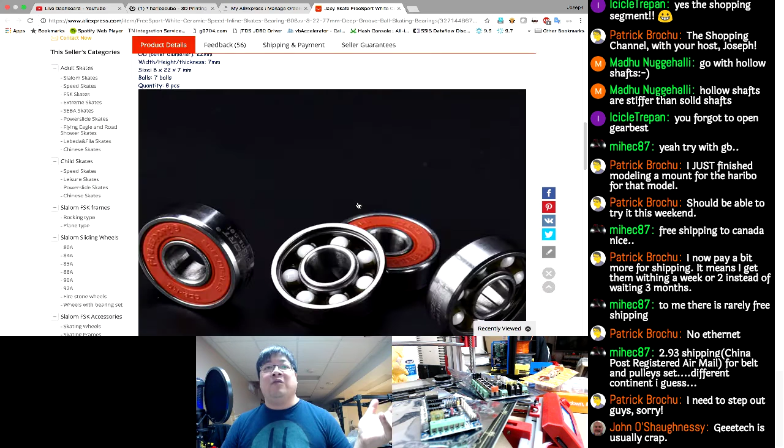So it is quite a bit more expensive than the cheaper 50-cent ones I'm getting. But these are full ceramic balls, and they roll pretty nice. But like I said, at $2 I only use it for friends, so I'm not gonna go with these for the ones that sell. The other ones are good enough.

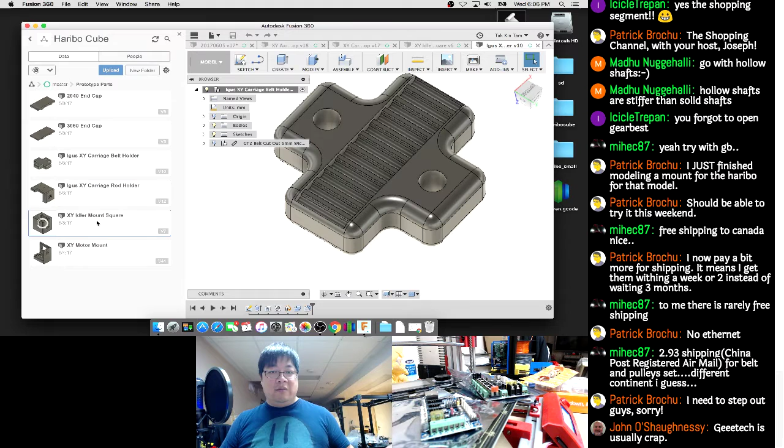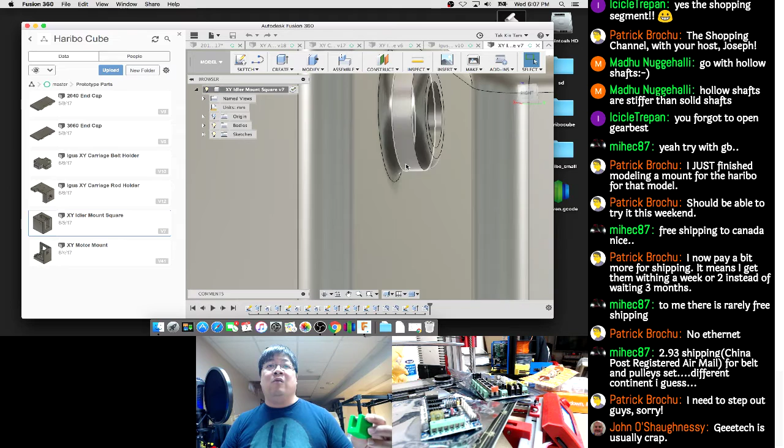So I think I mentioned this. The bearings ride on top of this protrusion, and the nice thing about it is that with the fillet, it actually printed this without support, which is pretty cool. It actually printed this whole thing out of the side wall without support. So that's something you could use fillets for, to make sure things like that print out fine, because that came out pretty good.

The part itself had absolutely no issue. I'm not gonna get focus, but it had absolutely no problems with that. And you can see from this angle that the idler screw is going to be pretty accessible. Same with the mounting. So I'm really happy with this part. I've been showing this off a bit, but I'm really happy with this part. I think that's it.